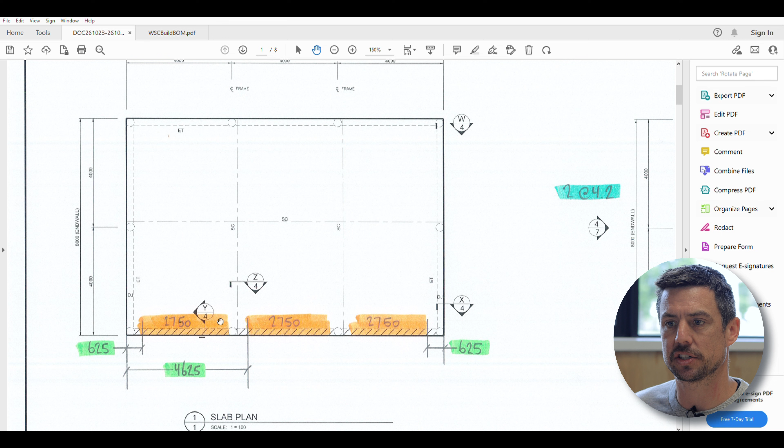It basically shows your bay widths and that type of thing, your overall slab size. These hatch lines show where your rebates are. These circles are where your footings are. Dash line is a saw cut, that type of thing. But as I say, we'll get into that in a separate video.

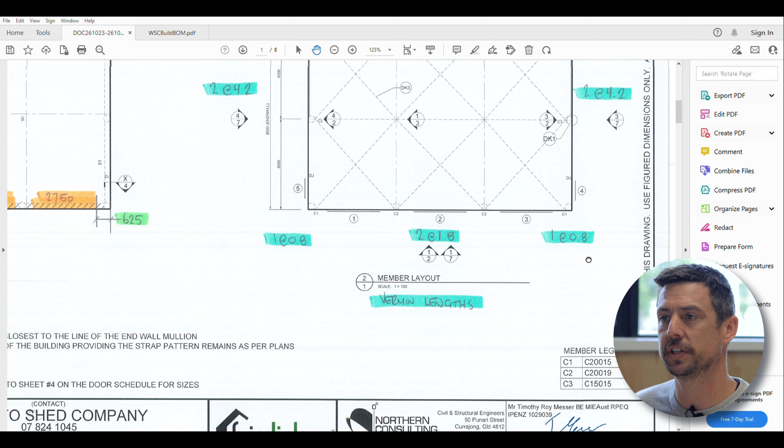We'll come across to this side. This is your member layout. So this is showing you these C1s and C2s. Now this relates to this little member legend here. The C2 is a C219, C1 a C215. So it's basically just telling you what material your columns are. It's a good little quick reference. Check out that member legend and then you're going to see what material is going into which of these spaces.

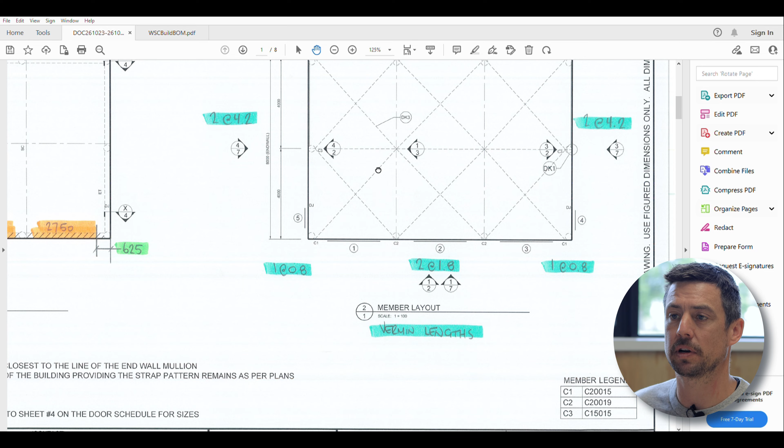Another thing that it's showing you is this dashed line that's showing your cross bracing in your roof. So when you're putting your cross bracing in, refer to this and make sure you've got crosses wherever it's telling you to put them. Another thing it's telling you is 1, 2 and 3. Now this is relating to things like your roller doors, and you can see this 4 and this 5 here. That's relating to your PA doors. So that is that.

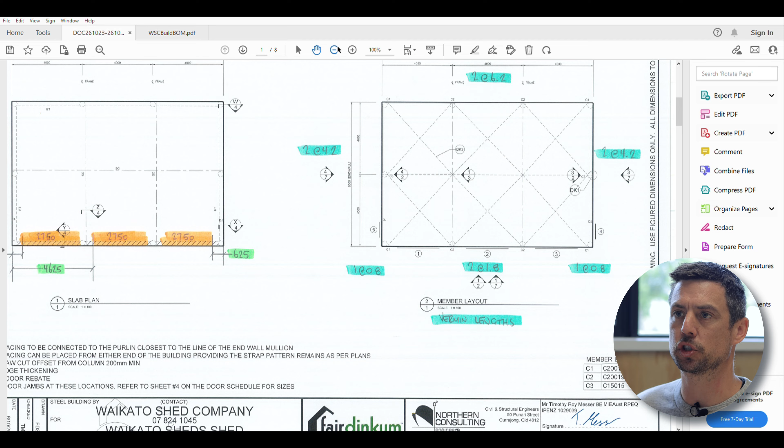What you'll also see is I've written here member lengths. That is just so that when you're getting material on site, it's obviously going to be a big pile of things with all these different varying measurements. So that's really just showing you what we've ordered and whereabouts on the building those are going. You'll see that we've kind of drawn all over this and that's purely just to help show you where some of that material is going to go.

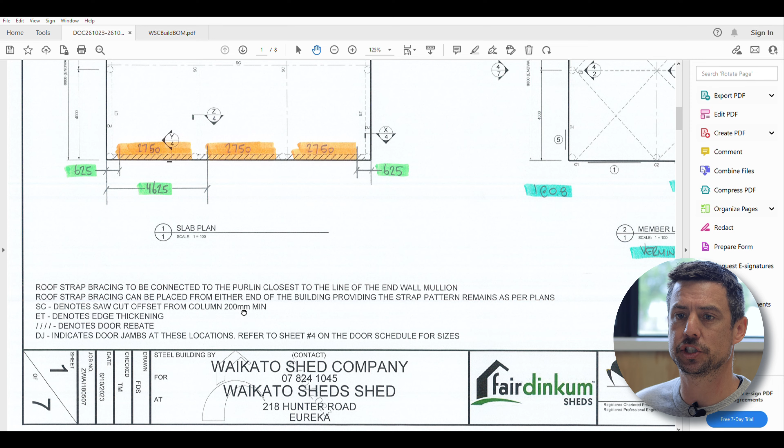If we carry on down to the bottom here, zoom in on this bit, there's a few extra notes. Your roof strap bracing to be connected to the purlin closest to the line of the endwall mullion. Just read through those notes and make sure that those all make sense in relation to what material goes where. That probably does it for the first page, and as I say, we'll come back to the concrete detail. Moving on, next page.

Now this is really the main page. This is the page you're going to spend a lot of time on, and it obviously shows the 4 different elevations of your shed. Again, I've marked and highlighted where some of these parts are. So we'll just do one elevation at a time. This is your sidewall exterior elevation. That's an important note: this is an exterior elevation, so we're looking at the building from the outside, looking in.

You can see here I've highlighted green for wall girts. Anything highlighted green is in relation to wall girts, and that's showing you that for these two here, there's going to be 2 lengths in your pack at 800. Working down, you've got 2 at 1.6, 2 at 1.6, 2 at 0.8. Nice and simple. And the way we set up our roller door jambs, we've got one that needs to run along the top of your roller doors, and we've got 3 at 2.7 for each of those doors.

Another thing that we'll supply you with is a whole bunch of photos, and if any of this doesn't make sense, there will almost certainly be a photo that you can look at, or multiple photos that you can look at, which will help clarify what those things are.

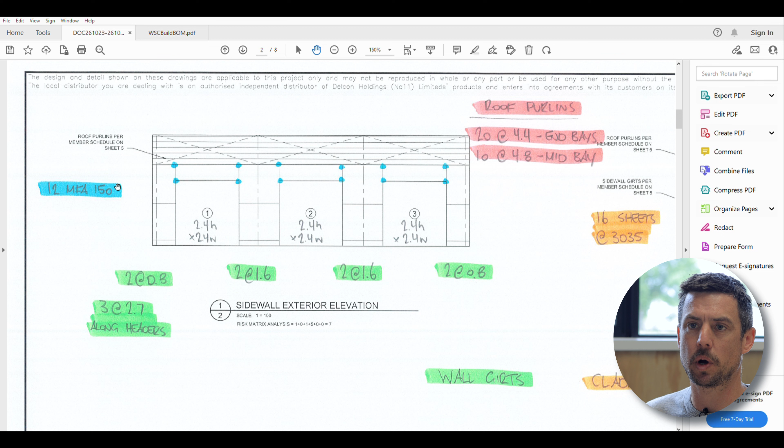Another thing here, 12 MFA 150s. An MFA is just a really simple right angle bracket, and we can use it in multiple different places in the building. So it's really just showing you we've got 12 in this side, and I'm showing you whereabouts those go in the building. Again, there'll definitely be photos that show that.

Roof purlins, just showing you how many in the building and whereabouts. 20 at 4.4 for the end bays, 10 at 4.8 in the middle bay. Pretty simple. Once you get the hang of that, you'll be away.

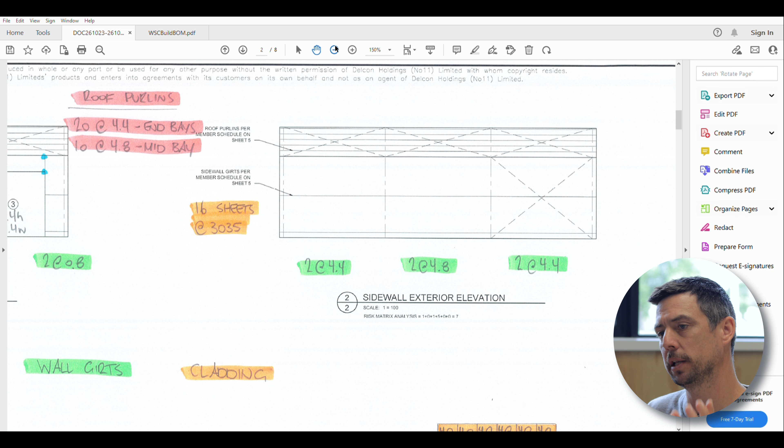Moving on along, another exterior elevation showing you the girts, and it's also showing you how many sidewall sheets and how long they are. So you'll be able to refer to this and then refer to your bill of materials. But we'll move on to the bill of materials once we get through these plans.

Down here, what you'll notice is we've got an endwall interior elevation. So this is looking at the building as if you're standing on the inside looking out. So that's important to understand that this is looking from the inside. Again, 8 at 4-1, nice and simple. You've got 8 top hats, 8 girts in this wall, and they're all 4-1.

Again, 4 MFAs showing you whereabouts they are. You'll see that we're using them where a girt meets the rafter. As I said, we can use MFAs in multiple different parts of the building, and we're also using it to mount the top of your mullion. A mullion fixing angle, that's exactly what it's for, top of your mullion.

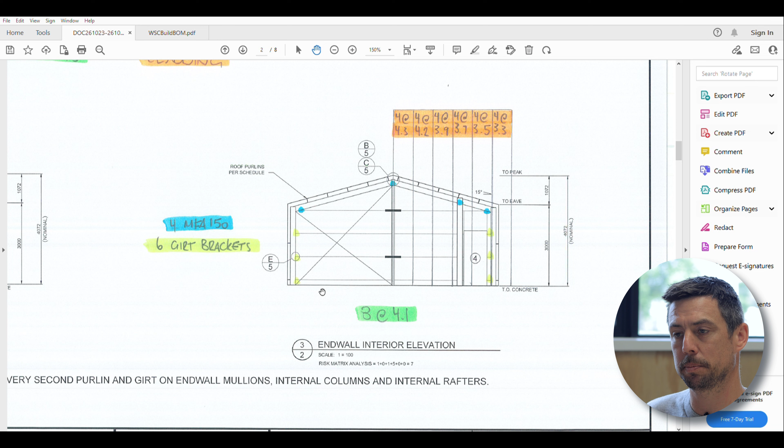And also, again, some strap bracing there, so make sure you're putting your strap bracing in before you finish your building. That's adding important strength to your building. Moving along, now this is going to be very similar, well actually it is identical to the other end wall. Interior elevation, same as.

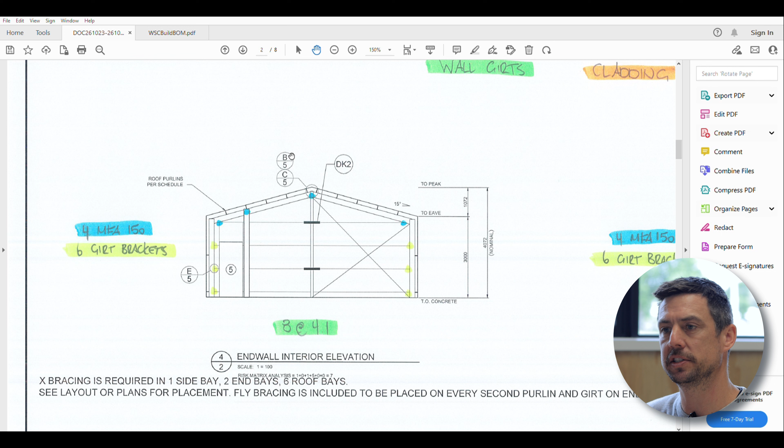Another thing that I want to point out is these things here, B5, C5, DK2. What that's referring to is a detail. What you'll see is detail B on page 5, detail C on page 5. So if you're ever confused or you want to see something in a bit more detail, refer to these circles and then go to that particular page, that particular detail, and that will help clarify that particular connection.

A couple of notes down the bottom here, X bracing is required in 1 side bay and 2 end bays. So you've got 1 end bay, 2 end bays, and then 1 side bay just here. So keep an eye on those notes for anything else that you might miss. That's probably it for that page.

We'll keep on moving. Now this is just a bit more of a cross section of your frame, an internal frame. This is showing your knee braces, your apex braces, and it's also showing you your spacings for your purlins. So that's kind of doing the work for you. It's telling you exactly where you need to position your roof purlins.

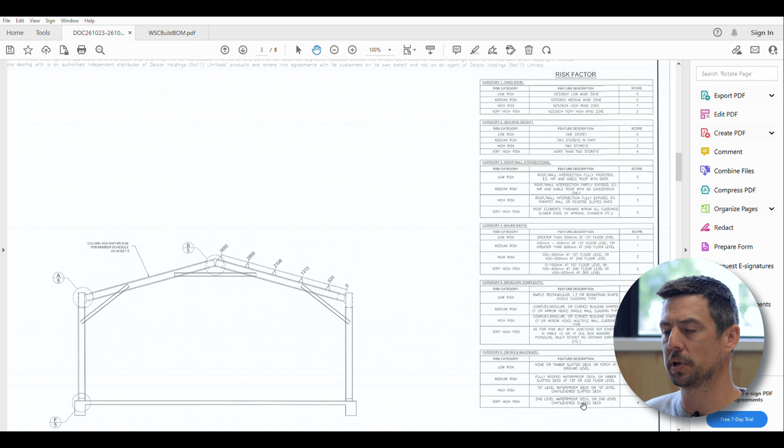Up here, risk factor, this is all sort of calculations and things that you won't need to spend too much time focusing on. That's all the technical stuff, not required when you're building your shed, so you can just move on past that. We'll keep on moving, page 4.

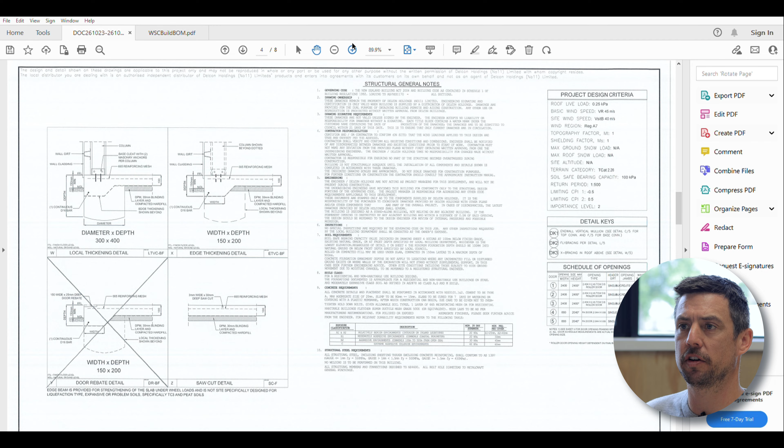Now we've got some footing detail. So this is another page you'll need to focus on when you're doing your slab. We won't focus on it too much at the moment. Just the footings, different areas of your building, saw cuts, that type of thing. So watch the reading your concrete plans video for a bit more detail about that. Yeah, that's probably it.

So you've got this schedule of openings here, down the bottom. Now just be careful of this. What you'll see on the other page is we would have written your roller door sizes on the plan. Focus on what we've written in there, and also don't focus too much on these joinery openings. If you've got joinery in your shed, we'll supply you with a joinery schedule, which is what has been ordered. So make sure you're focusing on the joinery schedule, not on the schedule of openings.

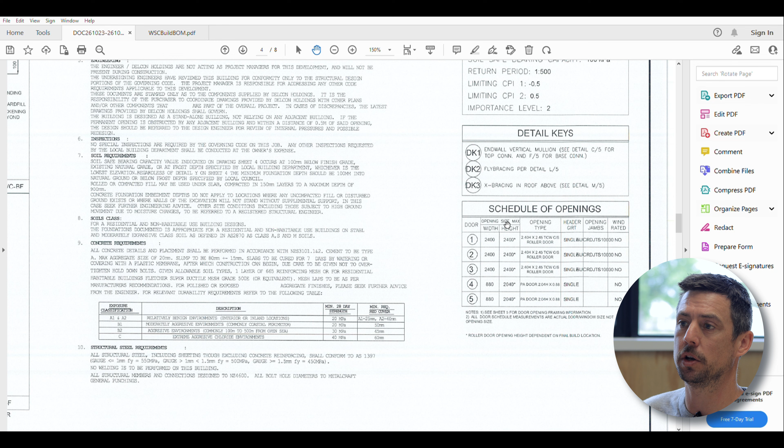All right, we'll keep on moving. Page 5. Now, you would have remembered on page 2 there were some circles showing some different details. This is the page where it will be showing. So I recall B5 being one of them. That's showing your apex connection. So you can check here for a bit of detail.

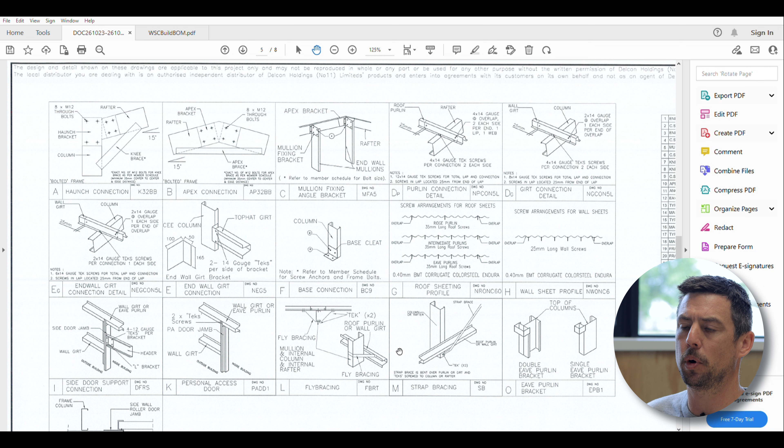Haunch connection, you've got your mullion connection with those MFAs that we've put in there. So check in here for anything where you're just wanting to see a little bit more detail. But also bear in mind that these plans can be quite generic.

So there might be some detail in here that doesn't necessarily relate to your shed. So just be wary of that. And if you're confused about anything, just get in touch with us and we can clarify some things. But yeah, page 5, really good for just seeing things in a little bit more detail.

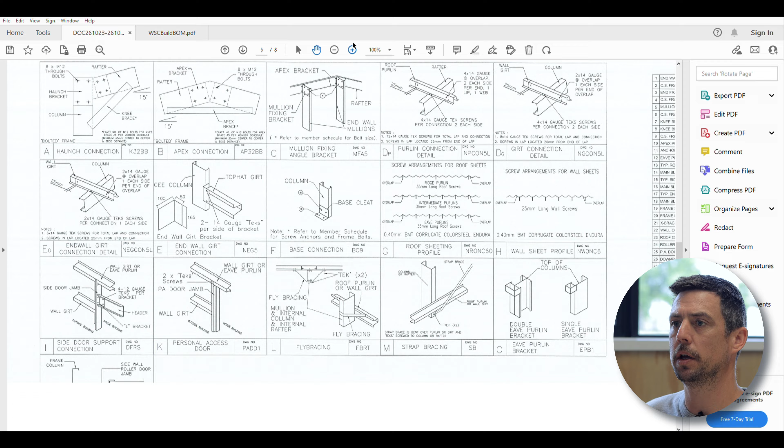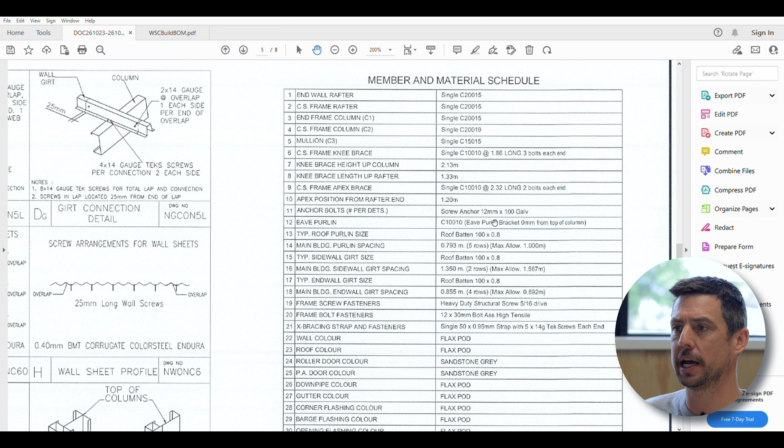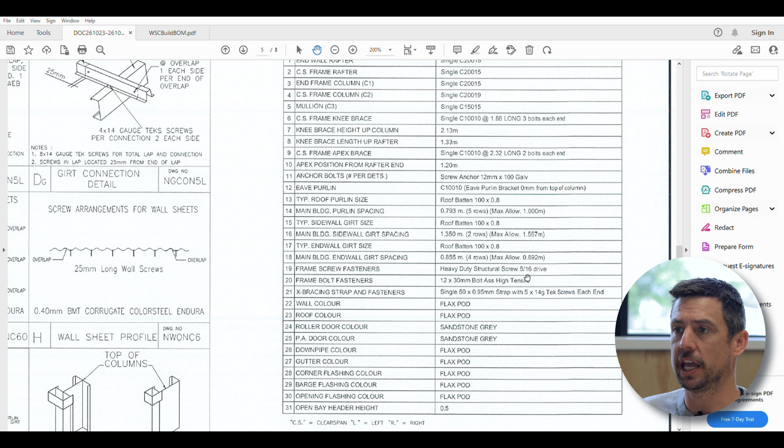It tells you about your knee braces. It's telling you how long they are, how many bolts on each end, how far up the column and how far up the rafter you are to get that right angle. Eave purlins, eave purlin bracket 0mm from top of column. Now you also want to be careful of that and use a straight edge when you're setting up your eave purlin. Run along the top of your purlins and make sure that eave purlin is in the right location. So yeah, this is a really good table. If you're confused about what goes where, this is really going to be a table that will help clarify all of that type of thing for you.

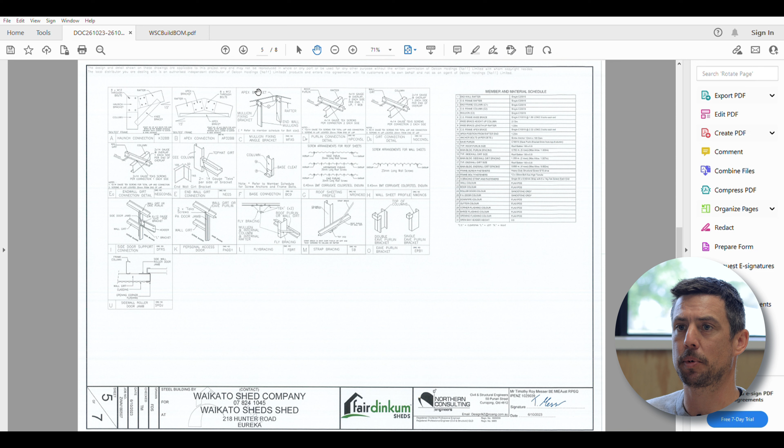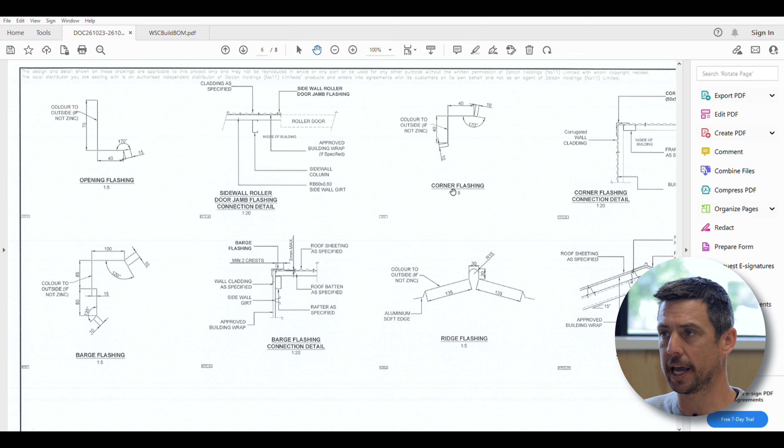That probably does it for page 5, so we'll keep pushing on. Page 6, flashing detail. Now we would have supplied you with a flashing order form. Those are the flashings that we like to order. Again, these can be quite generic and we like to do things a little bit better than this. So focus more on the flashing order forms that we've provided, and again, get in touch if you have any questions. We'll be able to point you in the right direction.

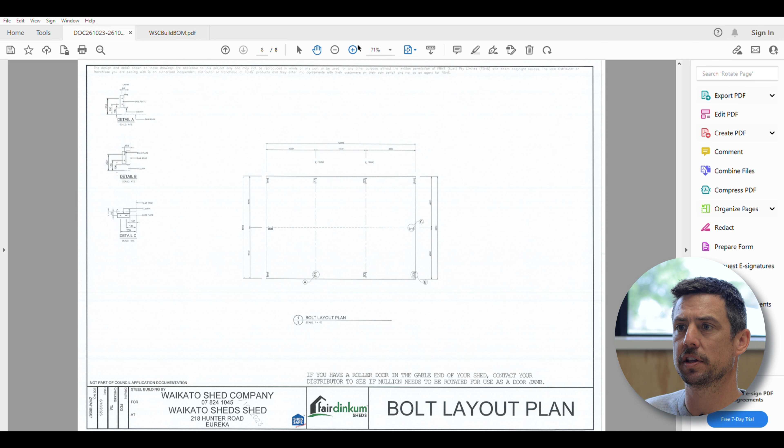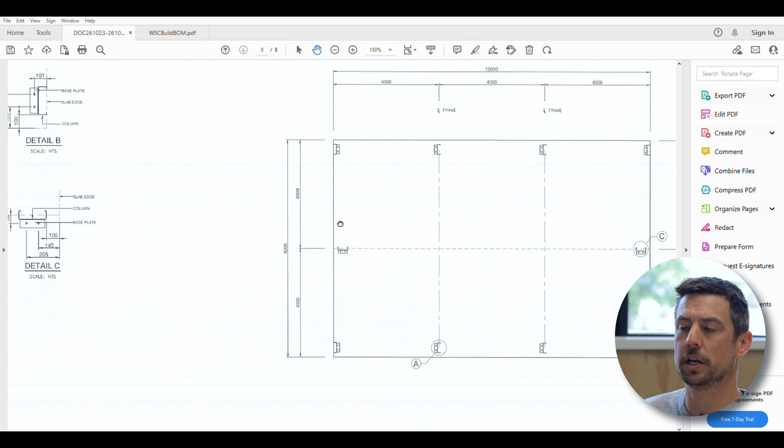And the very last page is the bolt layout plan. So this can be very helpful. It will show you kind of just how the portals will get laid out when they're finished. So when you're setting up your portals and you're wanting to just make sure you're on the right track, you'll see that these portals are set in from the side to allow for your top hat. So that's why you've got your gap. Your end wall girts sit inside your end columns, so that's why they're right on the edge. So pay attention to this page when you are really setting up your slab on those first few days when you're building portals and wanting to stand them up.

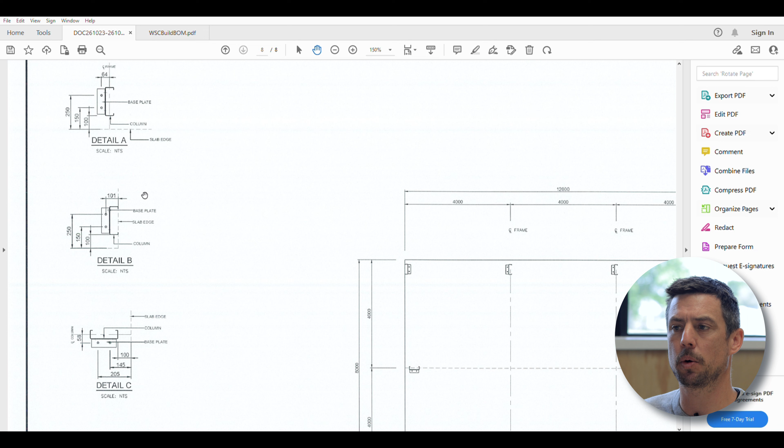You'll see this detail over here. This is kind of giving you locations of those base cleats. Yeah, I would probably not go and drill your holes before you've stood portals. I would be bolting those base cleats to your portal and then standing them up and then drilling your holes. It's just going to give you a bit more tolerance and a bit more room for adjustment. So you can look at this, but I wouldn't recommend drilling any holes before you've stood your portal.

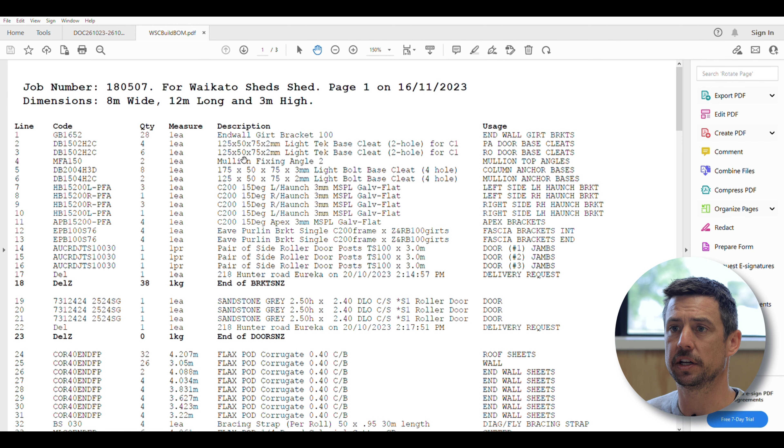That probably does it for the plans, but that is just one part of it. What I also want to talk to you about is your bill of materials. We call it a BOM. This is a breakdown of every piece of material in your shed. So when you're reading your plans, you can also refer to your bill of materials, and that's going to help clarify a few things. And this is starting with your brackets. It just lists out all the brackets. You can see our mullion brackets and things in there, your doors, your sheeting, ridge caps, gutters, the lot. So just another little piece of advice is to really focus on your bill of materials when you're working on your building, so you can just be allocating the right piece of material for the right part of the building.

I think that probably does it. Yeah, as I say, it's fairly simple. They're quite simple plans, but knowing where to look is very crucial to making your build nice and smooth. They can be generic, so just be aware of that. And if you're confused about anything, make sure you get in touch with us and we will definitely help you out.